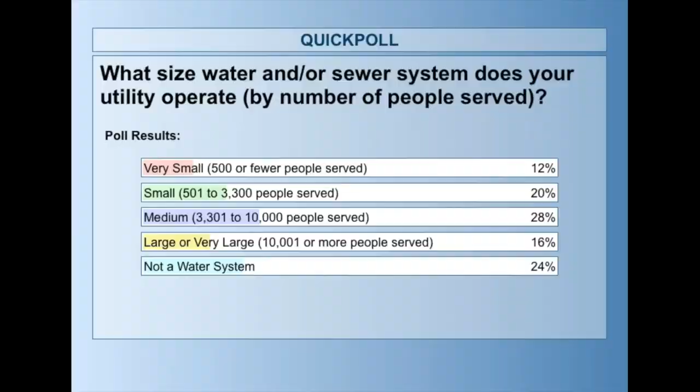Thank you, Tess. Good morning and thank you for joining us. My name is Annalee Harkins and I'm the Data Specialist and Project Manager here at the Environmental Finance Center based at the University of North Carolina at Chapel Hill. Our mission at the EFC is to enhance the ability of governments and other organizations to provide environmental programs and services in fair, effective, and financially sustainable ways. We particularly focus on water and wastewater systems.

My role at the EFC is to manage all of our statewide rate surveys and dashboards, which are tools we create to help utility managers and other decision makers effectively evaluate their rates. This is our first rate survey and dashboard for the state of New Hampshire, and we are very happy to be providing this tool and additional free resources, thanks to our survey partner, the New Hampshire Department of Environmental Services, who funded this project with assistance from the Smart Management for Small Water Systems project.

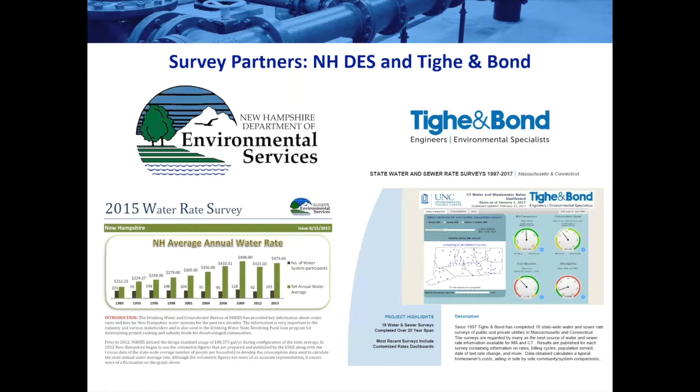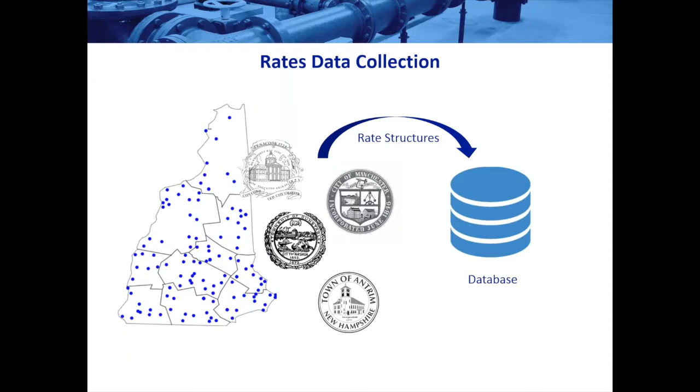We also have some additional data sources that we're using in this dashboard. We're utilizing census data from the 2012 to 2016 5-year estimate of the American Community Survey. We also are using HUC watershed information from the U.S. Geological Survey, system characteristics from the EPA's Safe Drinking Water Information System, and comprehensive annual financial reports from local governments.

So, who is in this survey group? There's 140 utilities, and altogether they're serving around 760,000 water customers. We don't actually have the data for the number of sewer customers, so water customers is just what we have right now. The majority of those are municipalities, and we also have some districts and about 18 for-profits.

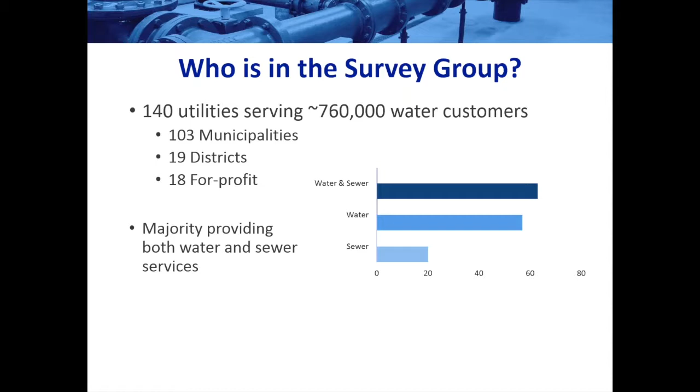Most of those utilities provide both water and sewer services. So you can see in the chart here on the right, there were 63 water and sewer utilities, 57 that provided just water only, and only 20 that provided just sewer only. These utilities combined serve 87% of the people in the state served by community water systems.

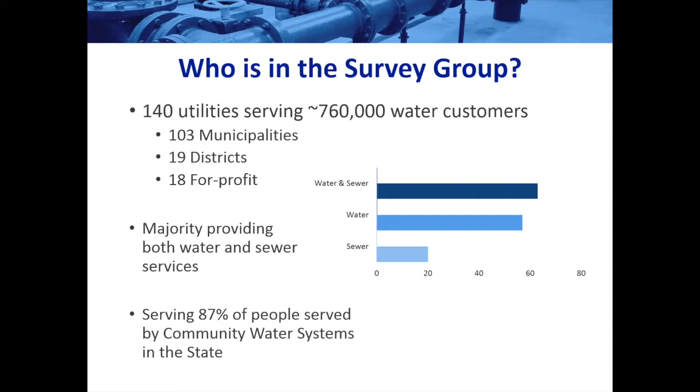All right, so next we're going to jump into the dashboard and how it works, what it is, and kind of how to find your way around it to be the best use to you.

So the first thing you'll see at the top is this drop-down menu here. I'm using Portsmouth as an example. So you can either start typing in the name of your utility, and it will show up in the search bar, or you can just scroll through the alphabet and select it from the drop-down menu.

The next thing we'll talk about on the left here, this is the consumption amount slider. It's set at a default of 6,000 gallons or 802 cubic feet, which we're using as kind of the default consumption point in the state of New Hampshire. In the Department of Environmental Services survey, they use an annual consumption amount of 71,996 gallons, which is almost exactly 6,000 gallons per month of usage.

So you'll also see these 3 radio buttons. It's set on water, but you can also select sewer or water and sewer if those services are applicable to the utility. And you can use this slider all the way down from 0, which is basically the base charge, all the way up to 15,000 gallons at 500 gallon increments.

You'll also see that the bill amount for the selected consumption amount is displayed right underneath the slider, and there's also the amount in price per gallon. So here it's a very small percentage of 1 cent per gallon.

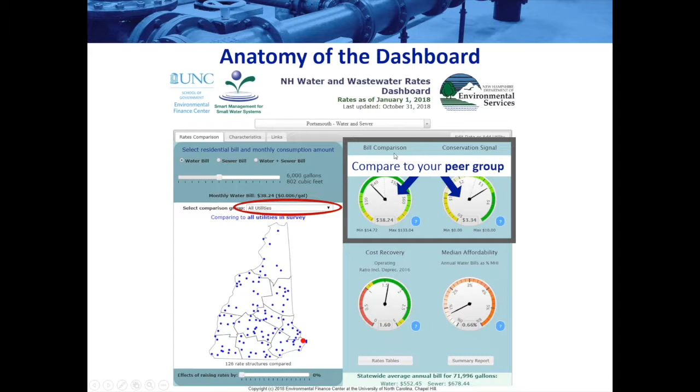On the right here, this right side of the dashboard, is where the dials are, which are kind of the main meat of the dashboard that give us a lot of information about the utility and the rate structures represented. These first 2 at the top compare to your peer group, which you've selected here over at the drop-down, which right now is on all utilities. We have bill comparison and conservation signal.

So let's talk about those comparison groups, like I said, all utilities. From the drop-down, you can select a variety of comparison groups based on your utility size, what kind of rate structure you're utilizing, your geographic location or watershed, your customer demographics, like customers that have the same median household income, the type of your utility, including your water source type, such as groundwater or surface water, and your financial information.

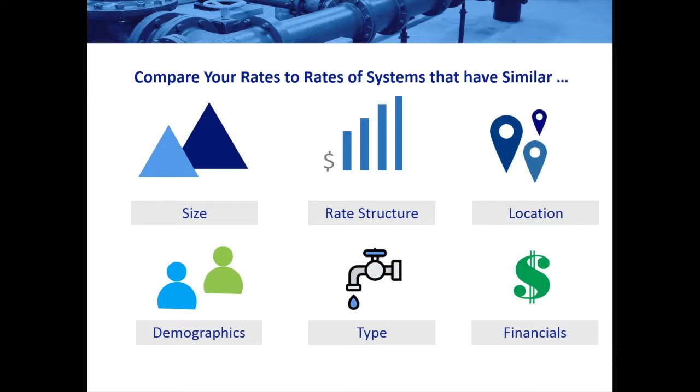For sewer customers, there's also a wastewater treatment type comparison group. So there's a lot of different ways to compare your utility rather than just kind of the typical look at the town to the left of you and the right of you and try to be lower than them, which is not generally financially sustainable and doesn't really account for all of the variables that go into financing your water wastewater system.

Okay, so let's go more into these top two dials. The first one, bill comparison, is directly related to what we've chosen here on the slider to the left.

Again, it's stating how many gallons you're choosing at the top. So we have water bill at 6,000 gallons. It's telling you what the median bill amount is, so at exactly the 50th percentile of your peer group, and also what the average is.

We included average as part of New Hampshire, which is something we haven't done before because we know that the Department of Environmental Services bases a lot of their decisions and analysis on average bill amounts. So in those dials, we have median as well as average, and the average is this little dotted line here, underlined with some dots.

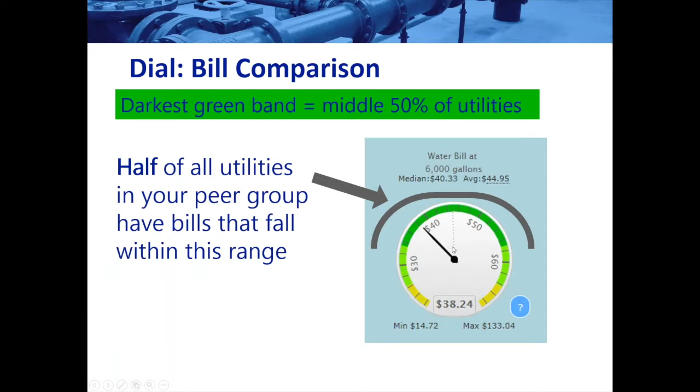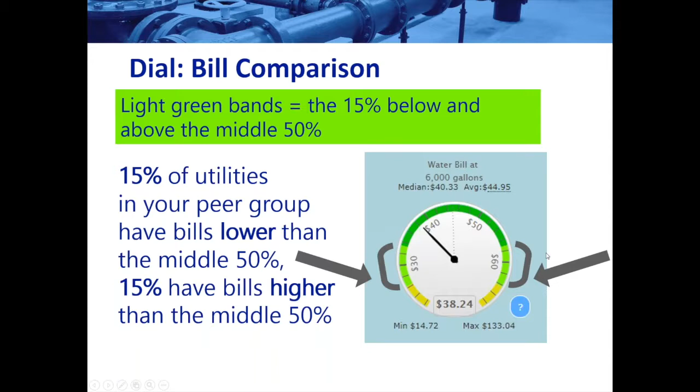So median is this middle dark green band. The light green bands to the left and right of the big dark green band in the middle are the next 15% of utilities, so 15% lower than the median and 15% higher. This goes from 10 to 25% on the left and from 75 to 90% on the right. This means you're either falling a little bit above your peer group or a little bit low.

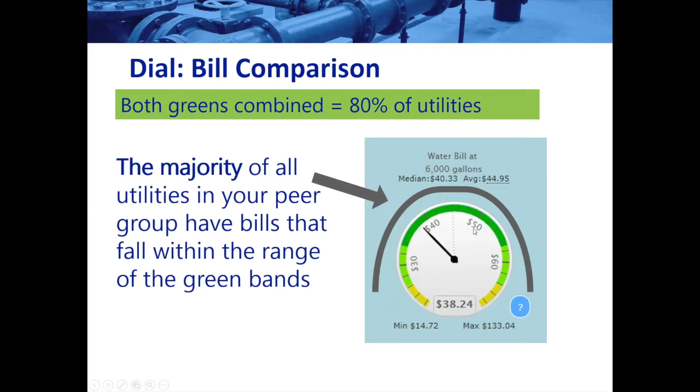If you're looking at both of these green sections combined, that's 80% of the utilities in your peer group, so that's really the bulk of the people in your group. If you're falling within that range, you're definitely falling right in line with the other utilities in your chosen peer group.

The last color, these little yellow bands on the very left and very right, are the lowest and highest 10% of bills for those utilities. So either you are charging far below what other utilities in your group are, or charging a lot more than other utilities. We also have on the bottom the minimum bill and the maximum bill listed for that chosen utility group.

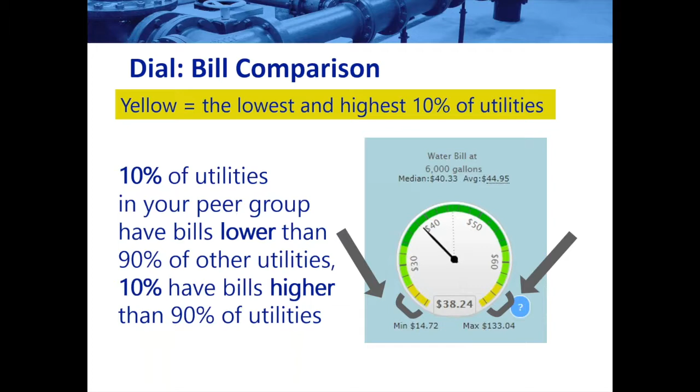All right, moving on to the next dial, we have conservation signal up here on the upper right. So the conservation signal has kind of a similar color scheme, and these colors are cut into quartiles. So in this example, we see this is like 25, 50, 75.

So in this bright green quartile, this utility is falling in there, so they're charging in the higher range of conservation signal. And what we mean by conservation signal is it's a pricing signal that you're sending to your customers to encourage them to conserve. So the more water that they use, the more you're going to charge per 1,000 gallons or cubic feet to encourage them to cut back on their usage.

So in this example, it's a moderately strong conservation signal, and again this is compared to your comparison group. So that has to be taken into account because 334 may not seem like a strong conservation signal in another group or another state, but within this comparison group, it is. And we also have that median as well as the average, which are pretty close.

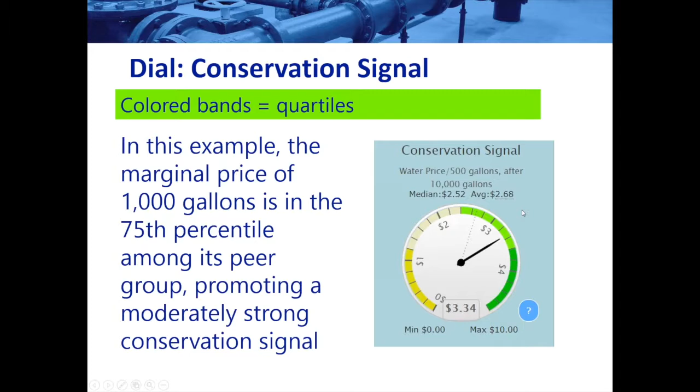All right, these bottom two dials on the dashboard compare to benchmarks. This is not related to your utility group. It's really comparing to yourself and to established benchmarks.

All right, this first one on the left, cost recovery, very important one, is directly below the bill comparison for a reason, because these two are obviously tied together. If your revenues are not above 1, that is, you're not even making ends meet as far as your operating expenses, that's directly related to the rates and fees that you're charging.

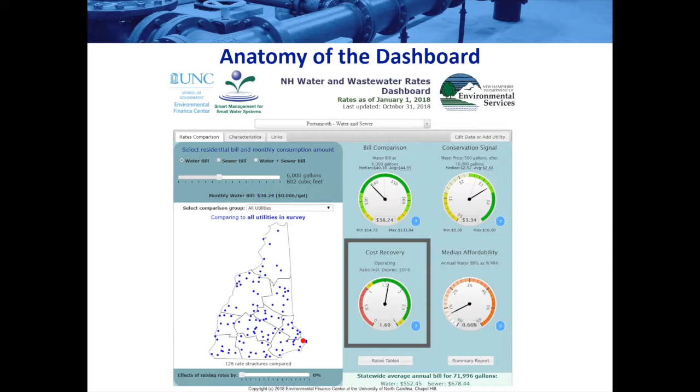So let's look more into the cost recovery dial. We have this red, yellow, green color scheme, kind of like traffic lights, to give you an instant idea of how you're doing financially according to your cost recovery ratio, which is your operating revenues divided by your operating expenses, including depreciation.

And we make a point of including depreciation because it can be very misleading not to account for that, to account for the inevitable decline and replacement of your infrastructure and equipment. So it's very important to include that so you're not thinking you may be better off than you are when really you're just not preparing to replace your equipment.

So if you are at below 1, you're not even making those ends meet. You're not able to cover your operating expenses, which is not a great place to be.

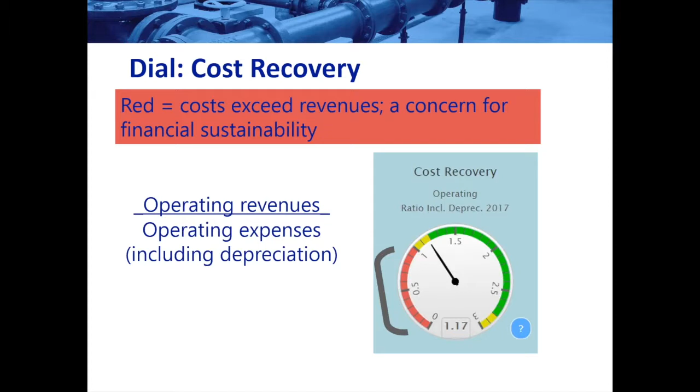We have this small yellow section between 1 and 1.2, and we chose 1.2. It's a little bit arbitrary. There are different funding agencies that use different metrics to decide whether or not they'll lend to you. It could be 1.2, it might be 1.1, it really depends on them. But for us, we chose 1.2 because it's kind of right there in the middle. That means you do have revenues sufficient enough to cover your expenses, but it could be problematic in the long term if you also don't have enough to save for future maintenance, capital improvement plans, emergencies, and equipment failures.

This last section, the dark green band on the right side, is really where you're aiming to be. You at least want to be in the yellow, but to be in the green is great. That means your revenues are likely enough to pay for your day-to-day expenses as well as your long-term goals. So if an emergency happens, if you have an unexpected decline in usage, any sort of reason, you are able to at least have a cushion to fall back on and not have to panic and go into emergency mode.

We do have a small slice of yellow here on the very right side, which is just kind of a caution of, is your operating ratio really that good? Either maybe you're not actually accounting for depreciation in a way that is accurate, or maybe there are affordability concerns for your community. If your ratio really is that high, it just might be something to take a second look at and see if you're potentially causing a future problem for yourself or for your community.

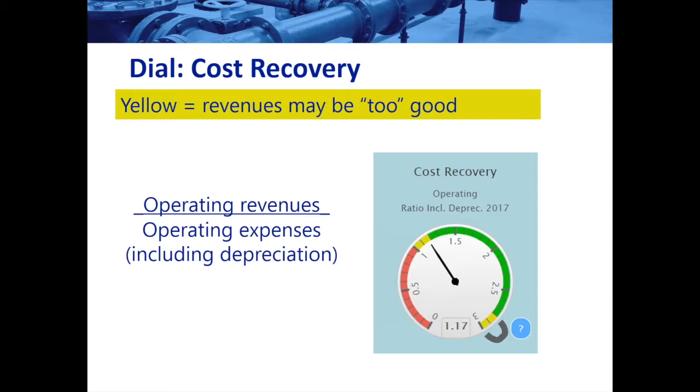All right, the next dial, this one on the lower right, is median affordability. And this one, as you can see, is a spectrum from this light tan color all the way to this darker orange or rust color. And this percentage is the percentage of a household's annual median income. This is based on the census data, so every utility on this dashboard is matched to a community listed in the census data.

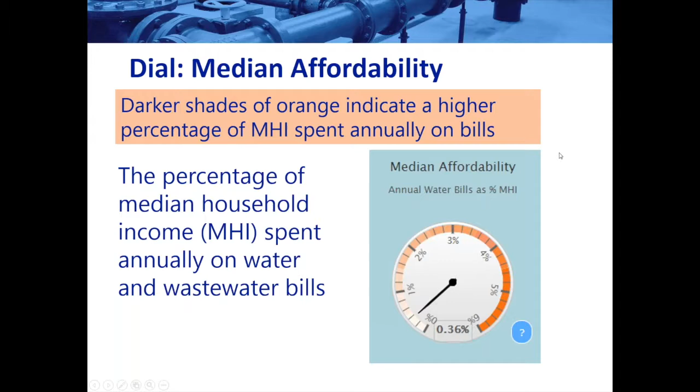So if your community is spending a higher percentage of their annual income on water and wastewater bills, that could be problematic. However, we have a lot of caveats for this dial. We know that it's a very complicated issue. So if you click on this little blue oval here to the right of the dial, which are on all the dials to give you more information, you can get some more information on affordability and some more nuanced ways to look at it.

So you can read more here. Since affordability doesn't really have a universal metric that captures all of the factors and nuances that may play a role in your community, we have additional information, including a free tool, our Residential Rates Affordability Assessment tool, that you can download and use to get a more in-depth look at affordability in your community. We also have some more information about what the percent MHI indicator means, what it assumes, and some other metrics that are being used besides percent MHI.

We've spent a lot of time on this main tab of the dashboard, rates comparison, but there are two other tabs. The characteristics tab has additional information on demographics, system characteristics, and financials for your chosen utility. Again, we're using Portsmouth as an example here.

And like the dials on the main tab, you're able to choose your comparison group, and these numbers will change based on that. So for Portsmouth here, we're again looking at all utilities, and this is giving you details on that city in particular: the number of connections, service population, as well as their financial data, and some demographics about their household size, median household income, and the poverty rate.

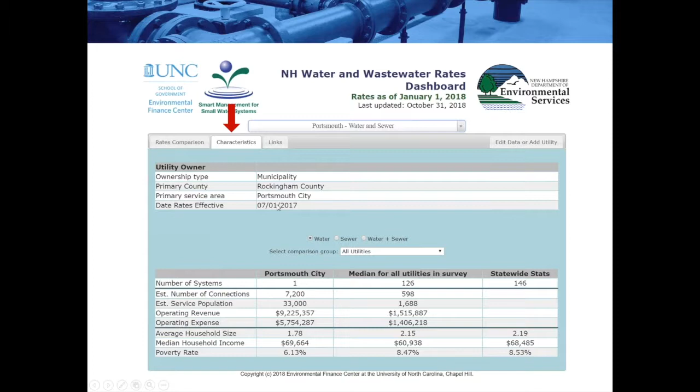You can also compare these numbers to the statewide statistics. There are 146 total rate structures in the survey, and for the state of New Hampshire, these are the numbers for the latest survey data, which is the 2012 to 2016 5-year American Community Survey Estimates from the census data. There's also some details about what type of utility it is—this is the municipality, of course—the county, the primary service area, which is the community it's matched to based on the census, and the date their rates were last changed.

Okay, the last tab here all the way on the right is the links tab. This has additional information on the survey itself and our funders, as well as links to additional tools. These are all free, so you can look into things regarding your rates, financial planning for the future, and affordability.

You can also request direct assistance through the Smart Management for Small Water Systems project. For New Hampshire, we have some of our partners within the state, including the DES, the Municipal Association, Granite State Rural Water Association, Tighe & Bond who helps collect rates in New Hampshire for us, and RCAP Solutions. And of course, you can also send me feedback or comments through that link there.

All right, now we get to take a look at some of the additional features and try the dashboard out live.

I'm going to show you how to navigate to it so you're not plopped there without knowing how you got there. This is our EFC website, efc.sog.unc.edu. A lot of dots, I know. Up here on the top bar where you have Resources, you click on Utility Financial Sustainability, and Rates Dashboards.

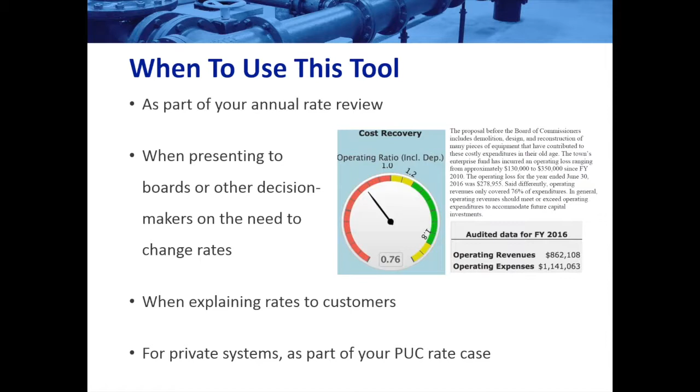You can also use this tool to explain rates to customers, because we hope it's fairly easy to understand, even though it has a lot of robust and complex data behind it. For private systems, you can also consider it as part of your PUC rate case, especially in showing how you compare to other utilities, including others of the same ownership type, like other private or for-profit utilities.

So these are just some options of how this tool can be useful to you. Like I mentioned, we do have additional resources. We have standardized rate sheets for all the utilities in the survey, giving details for water, wastewater, inside town, outside town, commercial rates if available, irrigation if available, and industrial rates. We have all the variables listed out for you, so you can pull this up and see it in an easy to understand way.

We also have tables of rate structures and computed bills at certain consumption amounts for residential, commercial, irrigation, and industrial rates. We also have tables of residential tap and impact fees, which we surveyed during the water and wastewater rate survey from about August to February. And we have an upcoming summary report that's going to go into more analysis of the utilities and rate structures included in this survey.

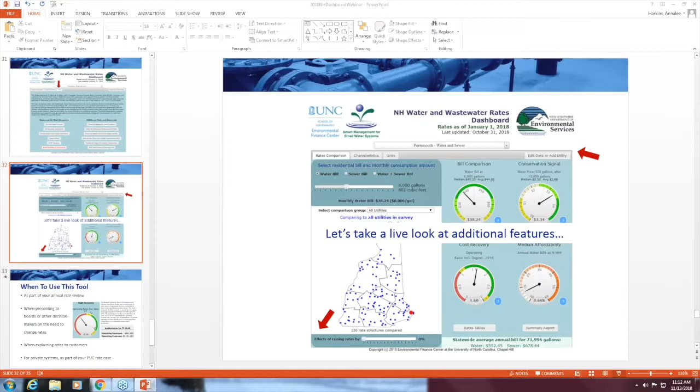All of these are going to be available at this link here. You can get to it either by going to that map under resources, going to the utility financial sustainability and rates dashboards. Going to that map and just clicking on New Hampshire, that will take you to the page with the different buttons. Right there, you can choose what you want.

The tables, you might be wondering what exactly that means. We have them in PDF and Excel spreadsheet form. So if you wanted to look at these numbers yourself and be able to manipulate and filter them, you can download these for free and use them however you want.

So I think this is downloading, maybe. Oh, there it is. Just take a look at that. My goodness. I don't think it's being influenced by me clicking it multiple times. Anyway, maybe it'll open at some point.

And then the last thing I want to mention that's available right now is viewing your utility's rate sheet, like I said. This is in the tab up here, and it's also at the button right there that you can click. This has all of the utilities included in the survey.

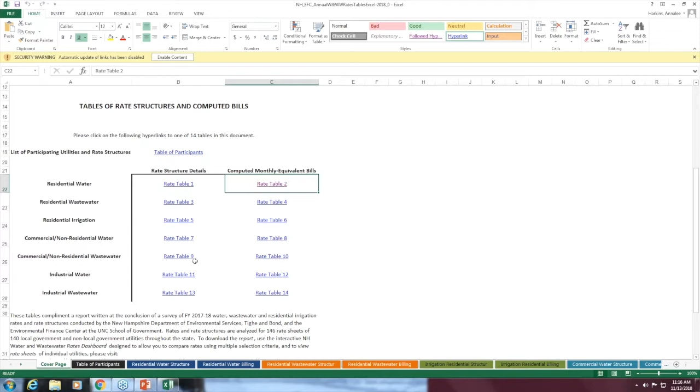But again, this goes through all sorts of things: irrigation, commercial, list of participants, great stuff. You can filter it, you can print it out, do whatever you want.

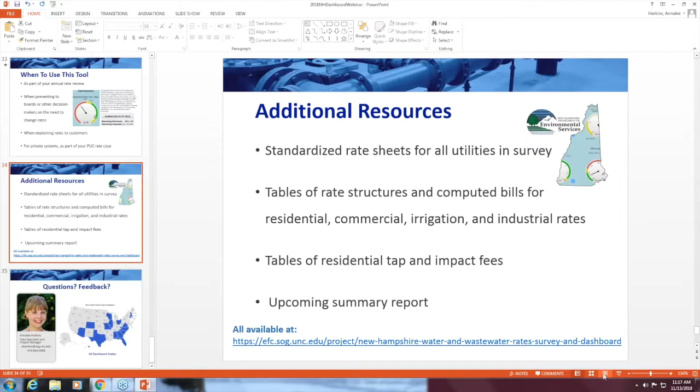Okay, so I think that's covered all of our resources for this survey that we have produced so far. And again, the summary report is going to be coming out soon. So if you have any questions or feedback, I'd love to hear it. Here's my contact information in case you have something you'd like to send me later, as well as my phone number. And again, thank you for staying and learning about the New Hampshire Water and Wastewater Rate Survey, as well as the dashboard. I look forward to hearing any questions you may have.

Great, thanks so much, Annalee. Like you said, we are. You can use that question dialog box to type in your question. We'll be accepting questions throughout the next 10 to 12 minutes or so. So the first question that we have for you, Annalee, is if the data for a system is incorrect in the database, can it be updated?

Yes, it can. We do regular updates of all of our dashboards. So if you just email me your updated rates information, we can definitely include that. Like I said, we do updates about once a quarter. So it may, depending on where we are in the year, it may be like a week before it's updated, or maybe a little longer. But we do update all these things regularly because we want the information to be as accurate as possible and to be as useful as to the utilities represented.